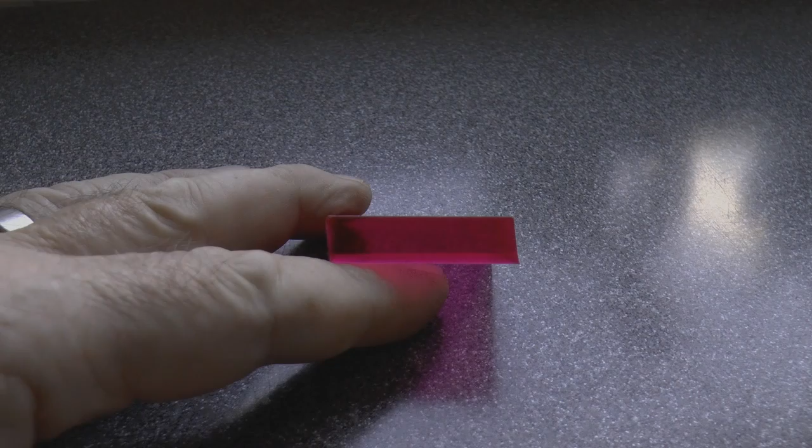Now, part one of this session was all about building a small laser targeting tool, and it was all preparation for part two, which is trying to solve this problem that I've got with the machine.

As you can see here, this is a side view of a piece of 10mm acrylic that was cut on my machine, and if you take a look at the left hand edge and the right hand edge, you see that they're both leaning over at about 3 maybe 4 degrees. It's a silly amount of error.

I thought it might have been a kerf problem, but in fact it can't be, because they're both leaning the same way. If they were leaning opposite ways, then I would think it was the laser beam itself. So there's something else significantly wrong with my machine when I'm cutting thick materials.

If we take a look at the y-axis, you'll see that they're pretty good. So it's only an x-axis problem.

My first reaction was that possibly the laser beam itself was not aligned correctly, and as it came out of the lens at the bottom, then it was being diverted and pulled to one side.

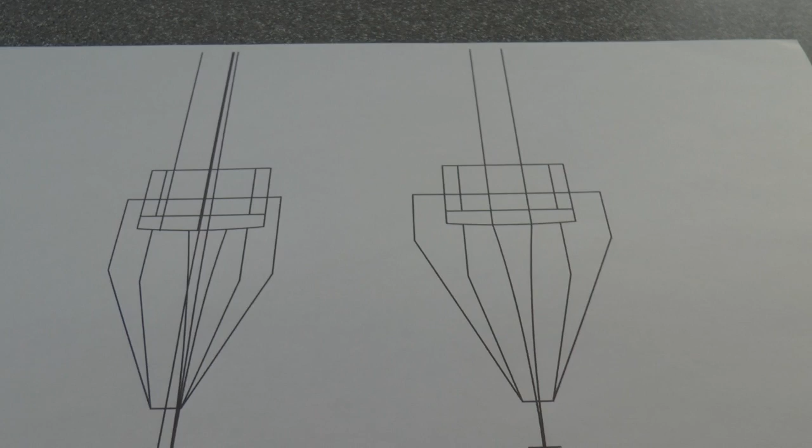So here we've got a little picture of the laser beam coming in at about 6mm diameter, and then being focused down to a point just below the lens here at about 6.5mm, and then 10mm further down, that's the thickness of my material.

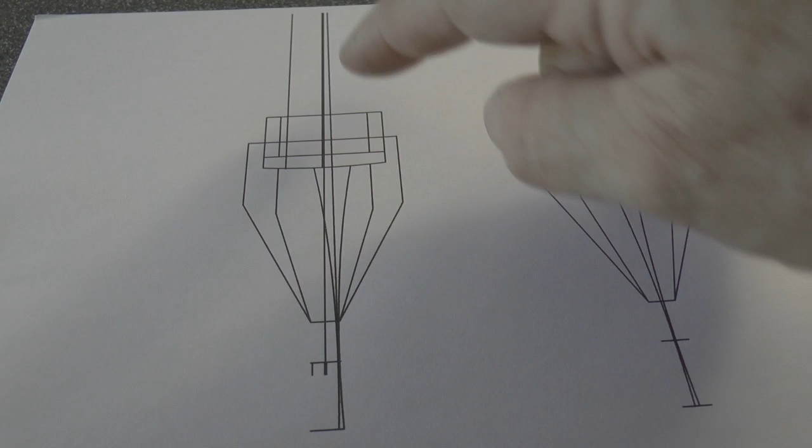Now, what I was looking at the possibility might be happening is that somehow the beam was coming down here, because the laser beam was off to the side, the focused beam itself was being diverted sideways.

Now this is the nozzle off the machine with the lens in it, and I've got a little LED laser light here. I know the lens material is specifically designed to focus the infrared CO2 radiation that is emitted from the laser. I think the lens will work sufficiently well with this red light to show us the effects that we're looking for.

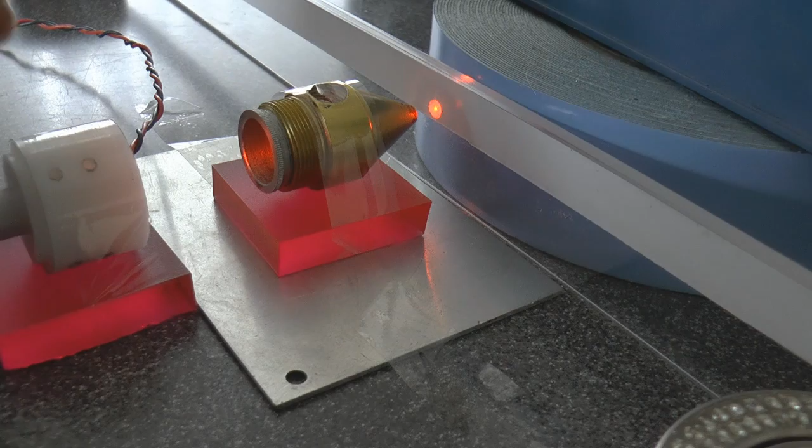So I've got several things to take into account here. First of all, I want the distance here to be approximately 6.5mm, and then I'm looking to get the spot into the centre of that lens, and I'm looking to get the bright spot in the centre of the red halo that's there. So that's pretty well lined up.

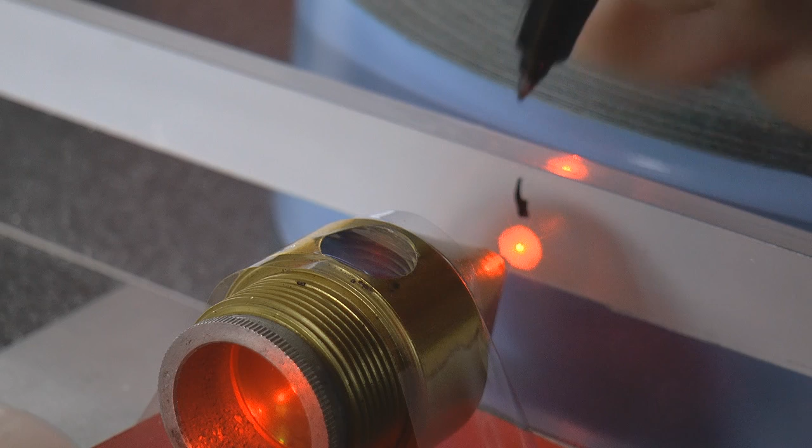And what I'm going to do with the marker pen is just approximately mark where that centre is. So I'm going to now move the laser to the left hand edge of the lens from the back here, and mark the centre of the shadow, and we do the same thing.

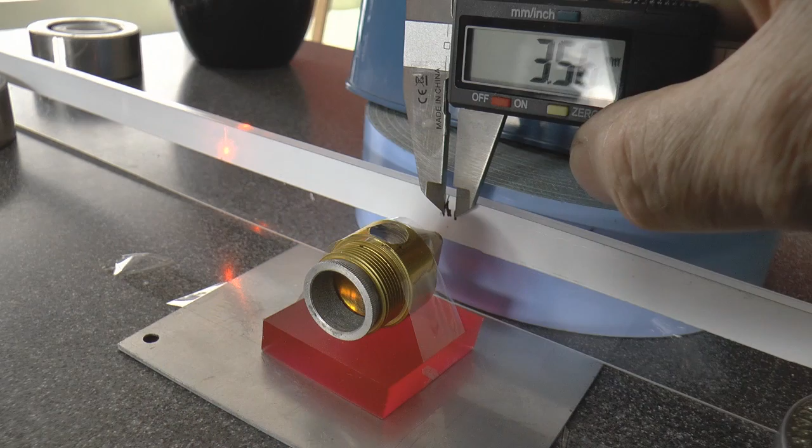We'll move to the centre the other way, and we should technically get the same amount of offset. Not a very good marker pen, but there we go. Yeah, I think I feel more comfortable with that being about 3.5 total variation.

Well, having checked what effect the parallel offset is likely to have, the beam is about 4 inches or 100mm back from the lens, so there cannot be too much of an angular error before the beam hits the side of the lens. It's quite interesting because you can see in here the reflection of what I'm doing with the light source.

And then you can see the light source on the lens here, and you can see the result on the projector at the front there.

I'm approximately 100mm back now, so let's line things up. I can make a small difference to the position of the light at the front there. In fact, the light itself is staying pretty close to its position, I would say less than probably a millimetre.

So I think what I conclude from this is that no matter how badly the laser beam is lined up relative to the lens, it can't be very far off angle, and any angular error that I'm likely to produce on the beam, because it's off centre to the lens, is going to be probably less than half a degree.

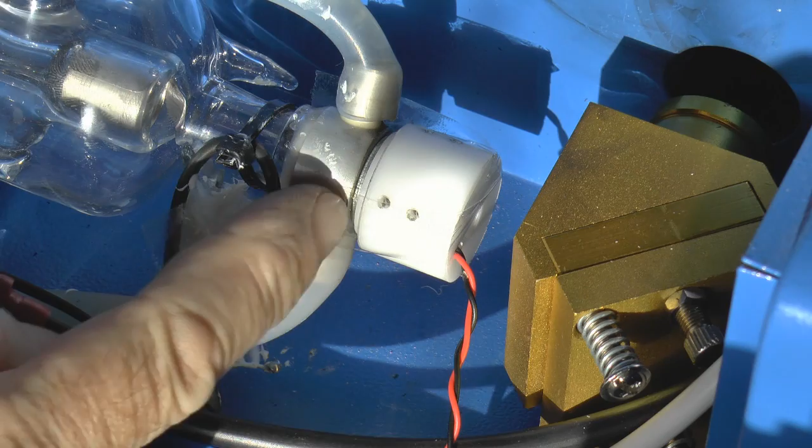Well, here we are at the back of the machine. I've used a piece of sellotape here to stick this flat back onto the surface of my water jacket here. I'm making a pretty bold assumption that the water jacket is true and square with the axis of the laser, more or less.

Now if we look closely just here, you'll see I've got a piece of sellotape holding this back and passing right across the front of the window. I want to make sure I keep this as flat and as uniform as possible, I don't want it to move. The little location spigot on the inside does a great job of centralizing it that way, but it doesn't necessarily control it if there's any clearance. A flat surface, which I've turned nice and square, will ensure this sits in line with the axes of everything. My beam is basically pretty well lined up.

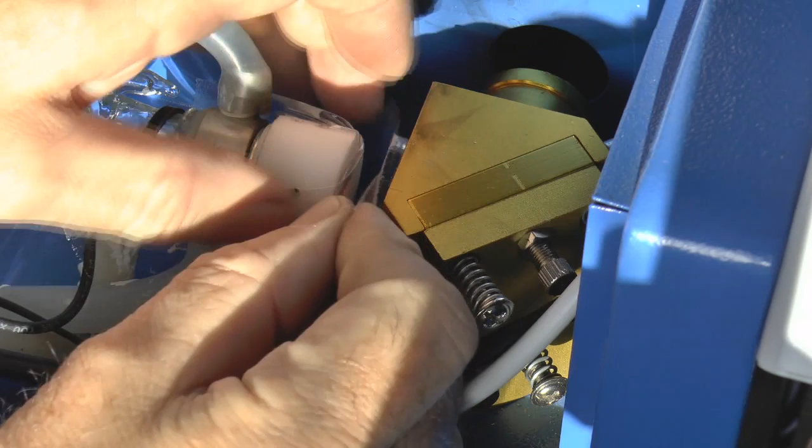This is working properly and approximately lined up. I should be able to see my red beam going through here, across the machine, down through the mirrors and coming out the bottom, not the nozzle because I've got that off at the moment, but we should see it appearing on the table. If you watch carefully down there, you'll probably see the red light come on. Here's one of the little targets I made in an earlier session, we'll just drop that into the opening here. It's probably a little difficult for you to see from this angle, but as I move my head around, I can see that beam is actually pretty well central to the crosshair. So I'm very pleased with that alignment.

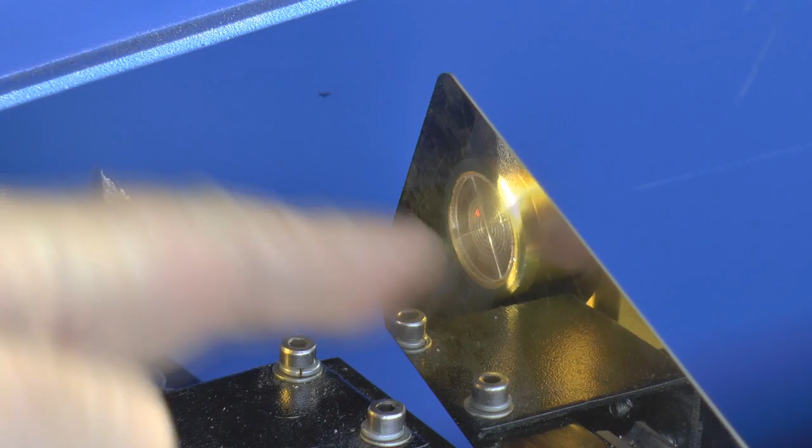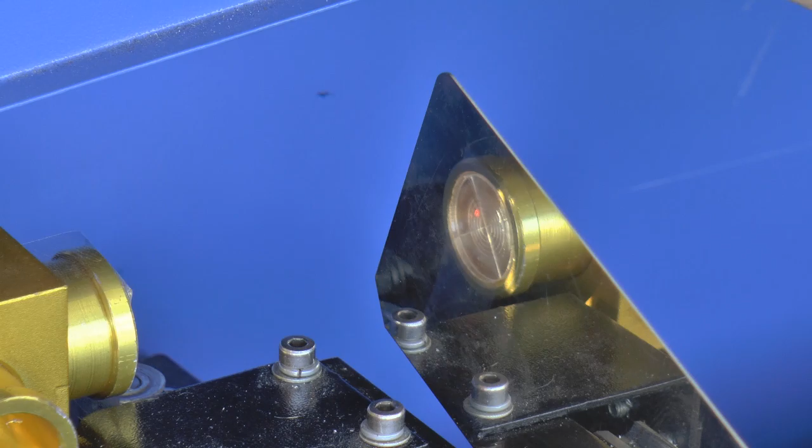Now mirror number 2 is going to be very difficult for you to see. Although this isn't a true mirror, it's reflective enough for you to see the actual spot. Let's see whether I can adjust that now with the rear mirror to come onto true centre, and I should be able to do that hopefully quite easily. Let's just loosen these lock nuts off a bit more.

So I want to steer the beam a little bit further towards me. It's the most difficult one, the bottom back one, which I think I want to adjust, and that is incredibly difficult to get to. I think the only way I'm going to get to that is with a pair of pliers. So what I've got here is a pair of pliers with some grippers on the inside. It gives me a chance of getting on there and making some small adjustments.

Look, and as I twist that, I can steer it onto centre. Now I need to come down a shade, which means I need to turn this top one slightly. And there we go, spot on centre.

Well, that was pretty easy once we got the adjustment sorted. So the beam is still off to the side there. What I should be able to do now is adjust these manually to tweak that one right into centre, and then we've got to get it up and down, which we should be able to do with the top screw. The top adjusting screw should give that to me. And there we are, look, spot on centre, just like that. It's unbelievable.

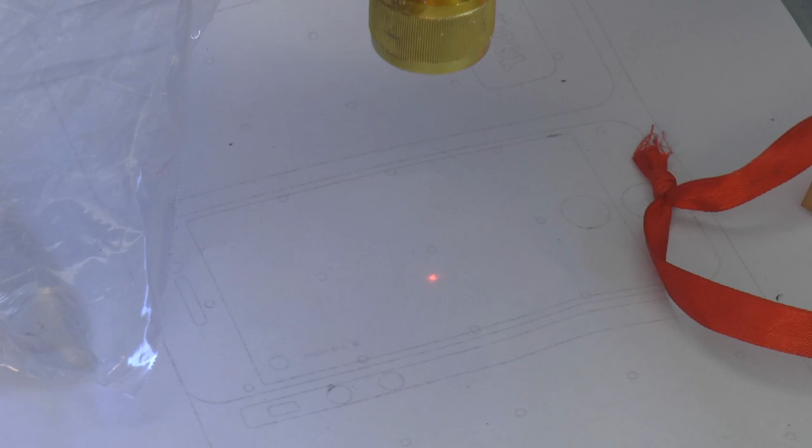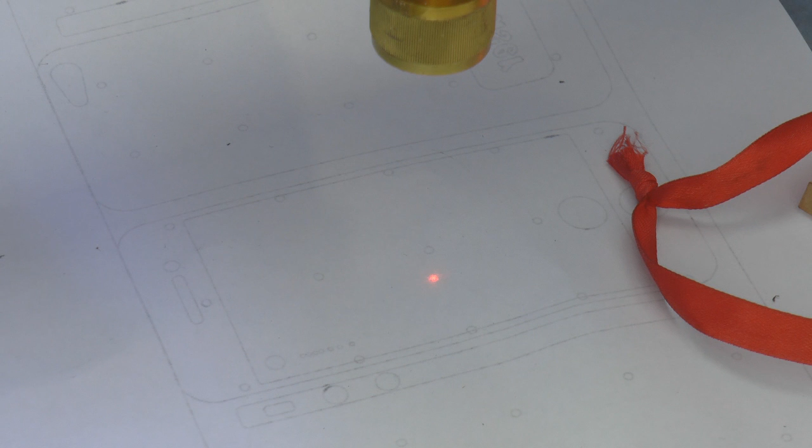And the end result is that we should have a beam coming out the end of the nozzle, which we do. Let's turn the laser off because we don't want the laser on, we'll turn the water pump off too. We don't want anything on except the power. Right, so we'll just turn the power on now, and when I do, the head is going to go into a reset. So I need to remove any clutter I've got sitting around the machine, because I need to wind the table up, and to do that I've got to have power on the machine. Check, check and check again, everything is off except the power. We'll turn the power on and it will go into a reset.

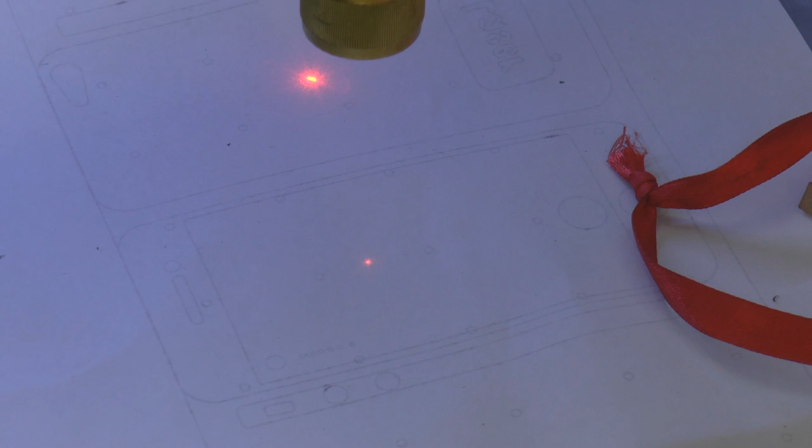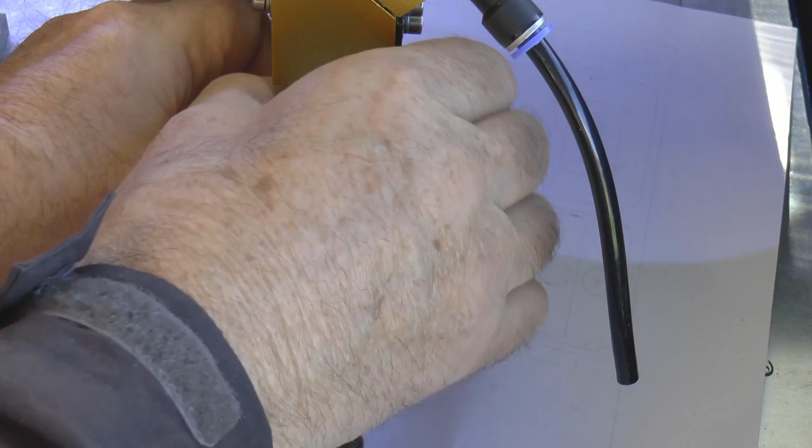And then we can just drive the head back again to where we can see it. There we go. Now what we're going to do is bring the table up. I've used my big target here, and we just drop the nozzle holder down over it so that it's central. Then we'll lift the nozzle holder up again and tighten it up, and then we'll check the position of the dot.

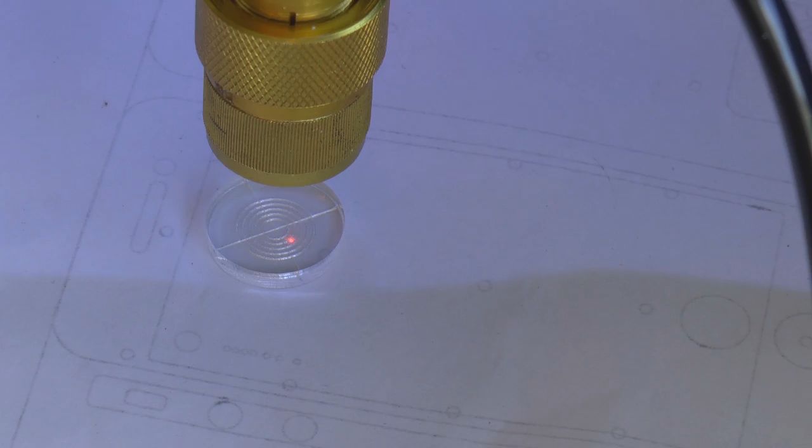It is not central, but now it should be a fairly simple matter of adjusting these screws on the head here. There we go, so we've got the right grub screw now. So we just loosen these screws off on the head, these locking screws, and now we should be able to adjust the screws on the head and steer it to centre. Can't go any more that way, so I'll have to take both of those.

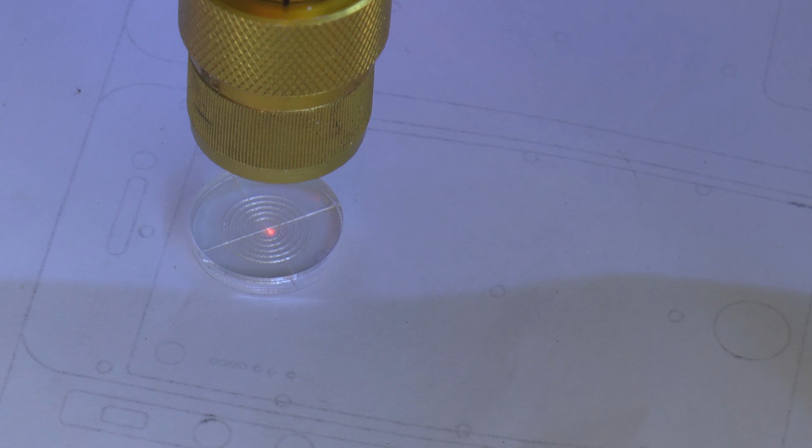That's pretty well on centre. So finally what I'm going to do is go to the four corners of the machine where they recommend you test this. We'll jog it to the corners and make sure we've got a clean little red spot there. And then we'll take it to the other extreme.

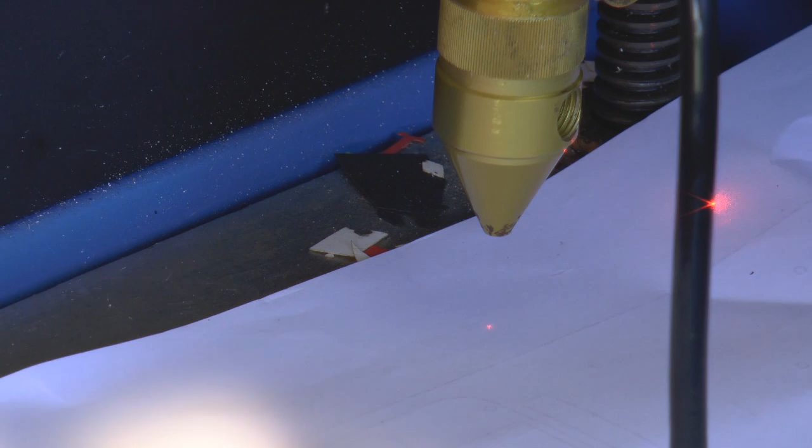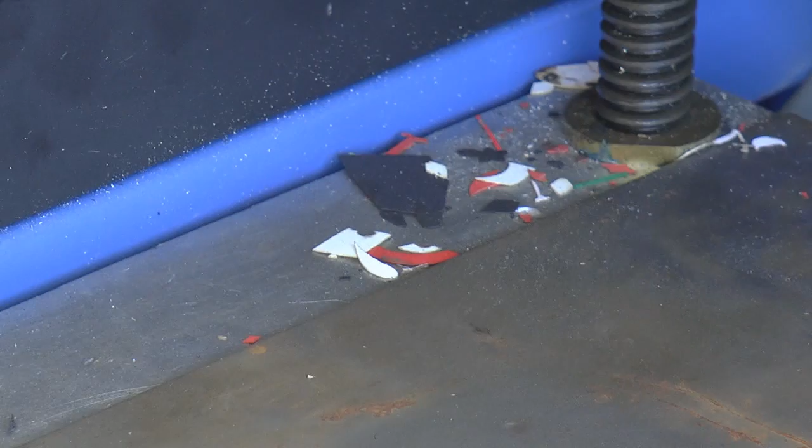And we've got a little red spot there. Now we'll come to the front corner, and we've still got a nice little red spot down here. Front left-hand corner, and sure enough, it's there as well.

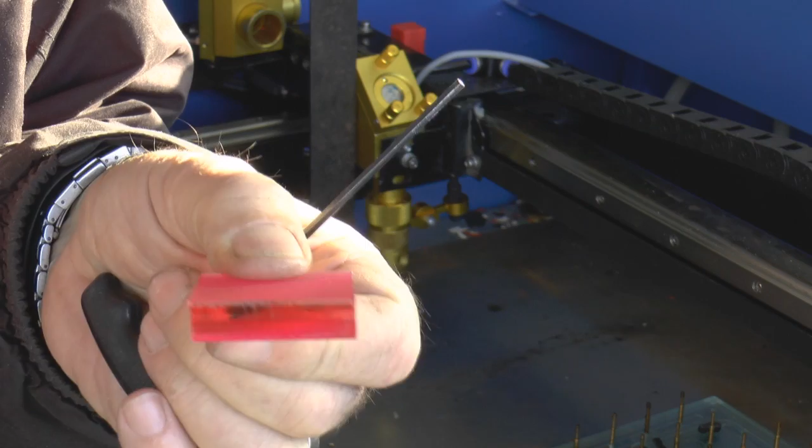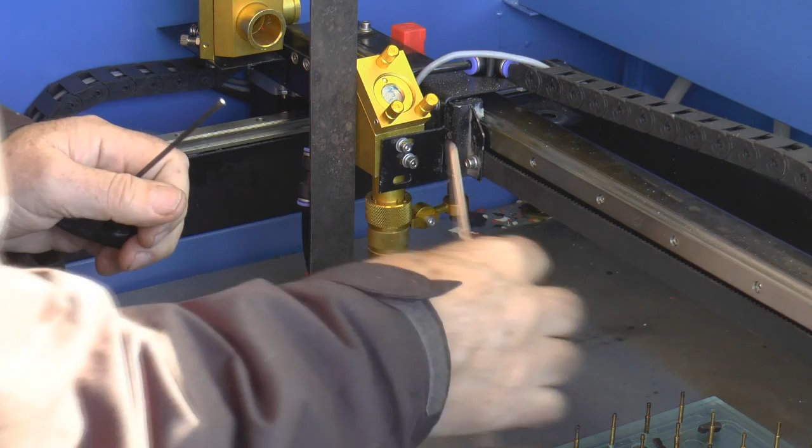That hasn't stopped us having great success with this new toy, in trying to find out why I was getting this pretty significant angle on the side here, like this, in the x-axis. It's pretty obvious now I see it, but if you take a look at the head, you'll see that the head is way out of line.

In fact, when I put a square on my work table, and this is a 1mm thick piece of wood, look, the best part of 1.5mm at the bottom here - that's a long way out of square. I'll set it back to square and just tighten these two screws up.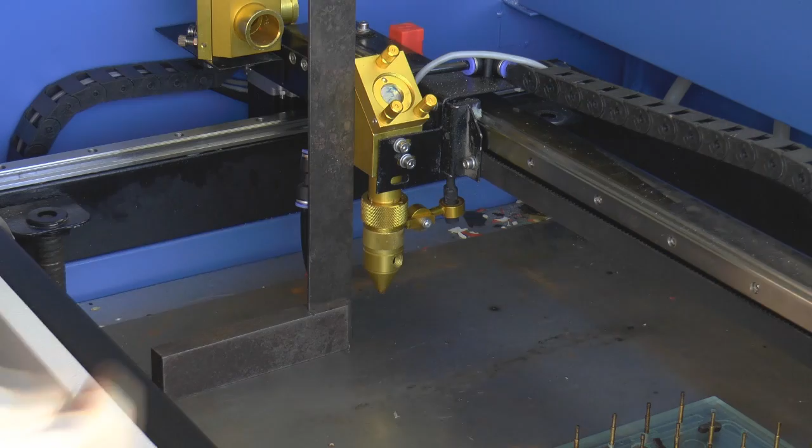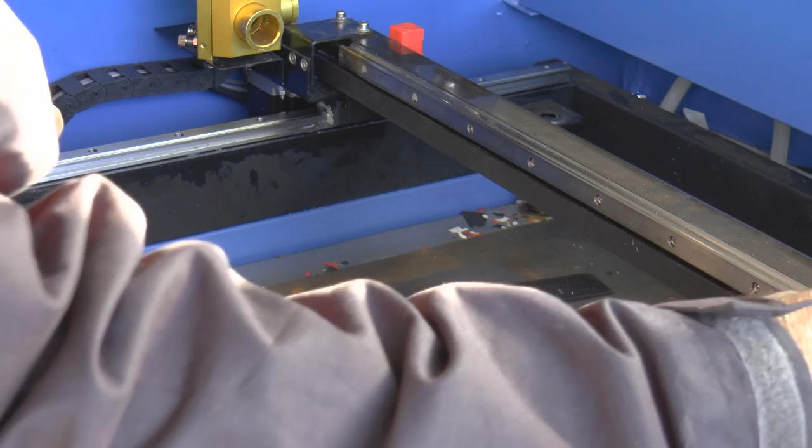Now, the problem with having adjusted this head this way is I possibly could have messed up my mirrors. And that's now the great advantage of having this dynamic red beam system. So I'll just push that to an extremity and drop my target in. But it's not that far off centre that I think I need to worry.

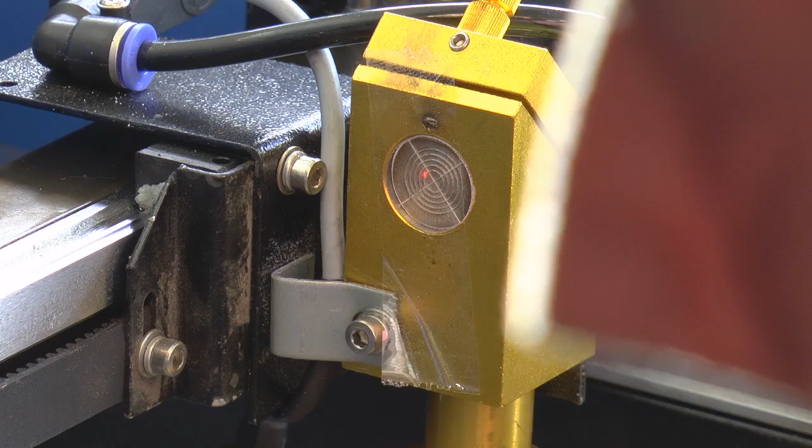I mean, I can very easily - to be honest, I don't see why I should even be concerned, because all I've got to do is think which way the mirror's got to go. It's got to come undone. So I can just loosen this bottom one off very slightly, look, and just like that I can put it straight back onto target. And then when we take this out, look down on the table there, and there's our spot still there. No more worries about mirror alignment.

There was a time when I thought, well, I might leave that little adjustment - it's near enough. It doesn't have to be near enough now. I can get it spot on.

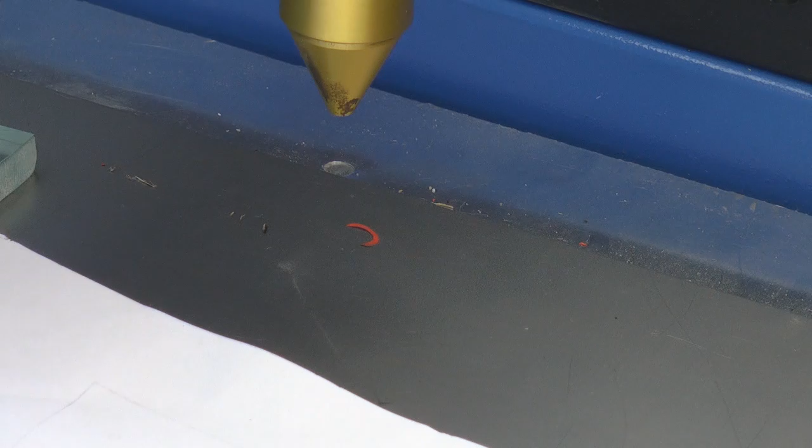Now we're going to have to go and test the machine with a real laser, to make sure everything is working okay. And the quickest and best test for that is to come down here to the nozzle. So we've just removed my little red laser pointer from the mouth of the laser, and we're okay to now power up the machine again.

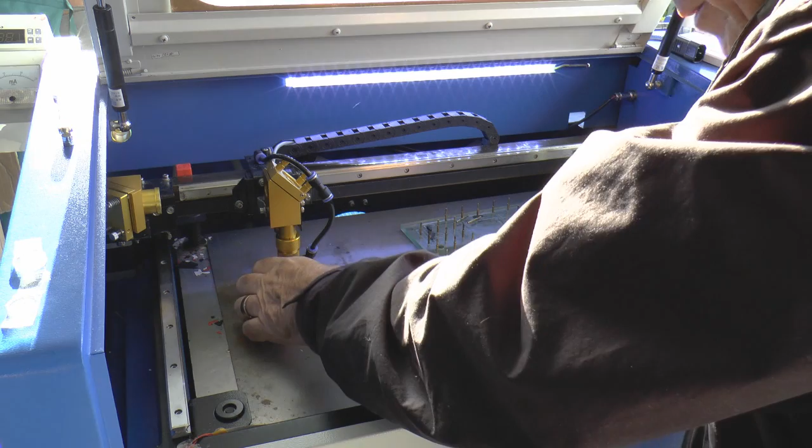We'll turn the air assist on, because I don't want to cause smoke to go up into the lens. And now we'll raise the table. Now this is my preferred method, a nozzle test. Use a piece of soft wood - this is plywood - and I've just clamped it between the head and the table, and I'm just rotating it.

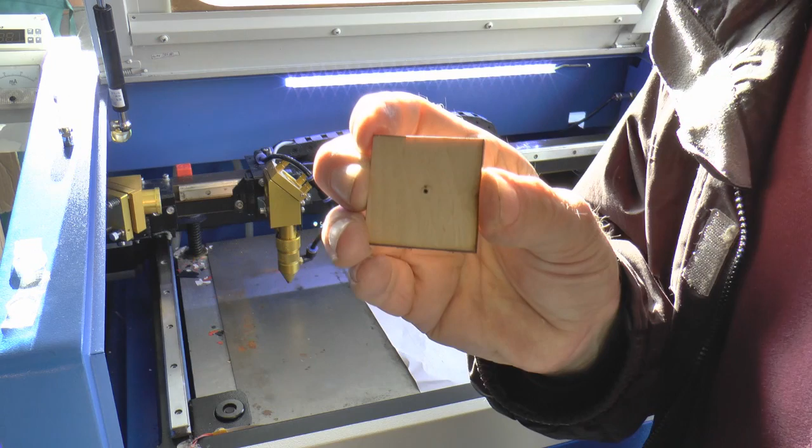Okay, now we'll do a pulse test, and you'll see the smoke. Drop the table down, and I hope you can see there that what we've got is a hole - not perfectly in the middle, but sufficiently in the middle to not worry me at all.

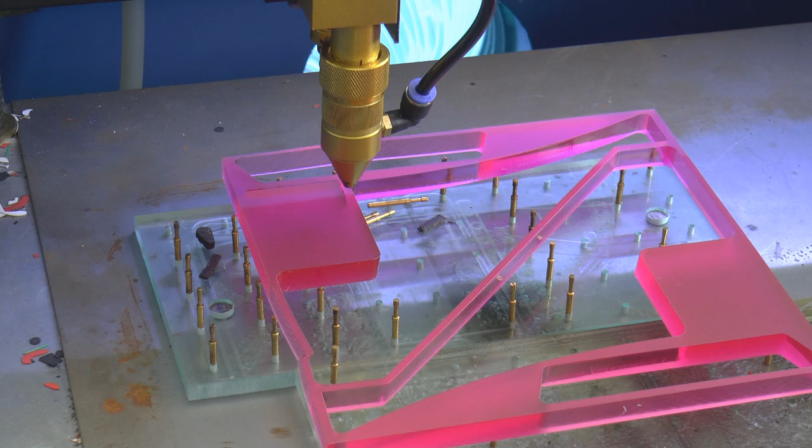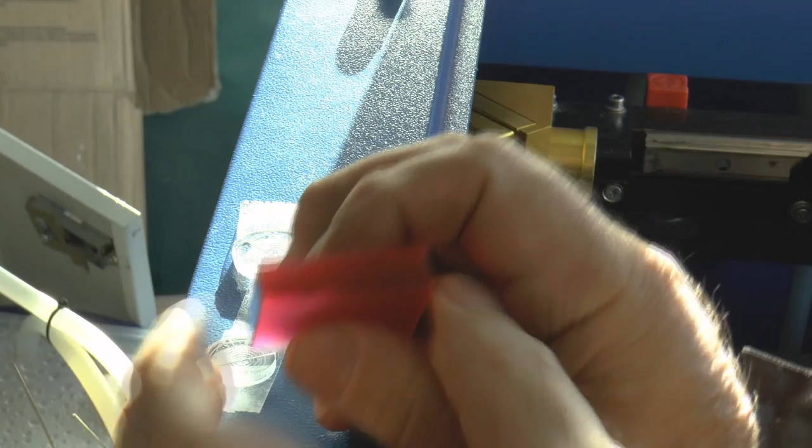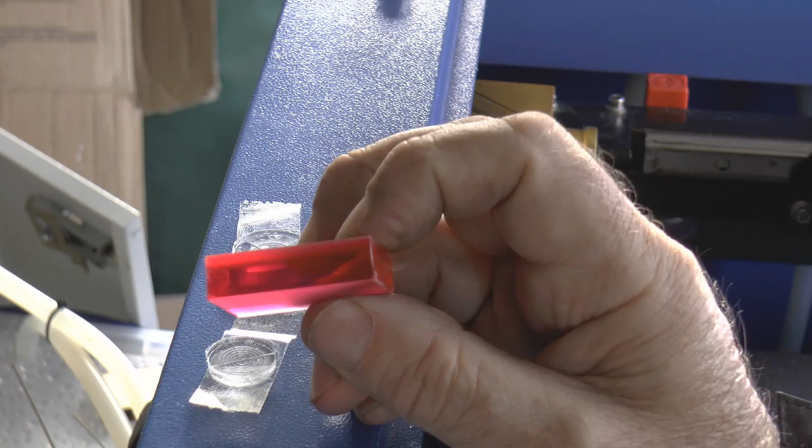So it was all a matter of the squareness of the head to the table, and that may well be something that moved in transit that I never bothered to check - it wouldn't have shown up unless I'd been doing this very, very thick work.